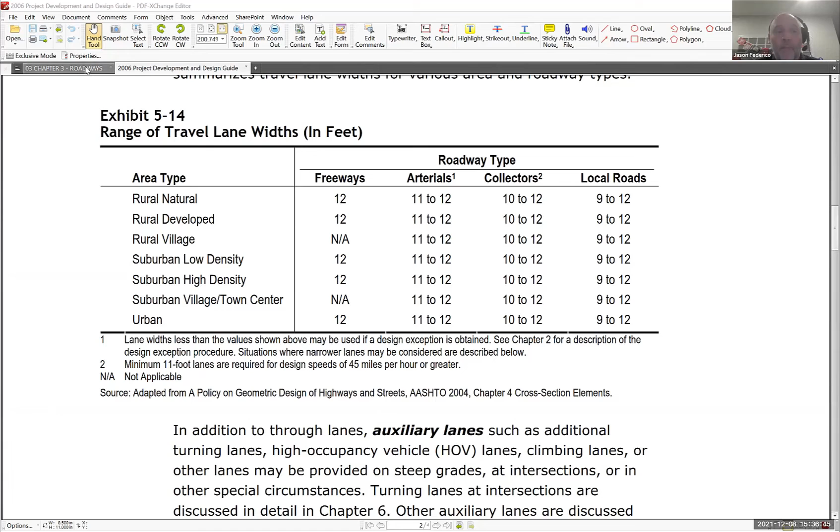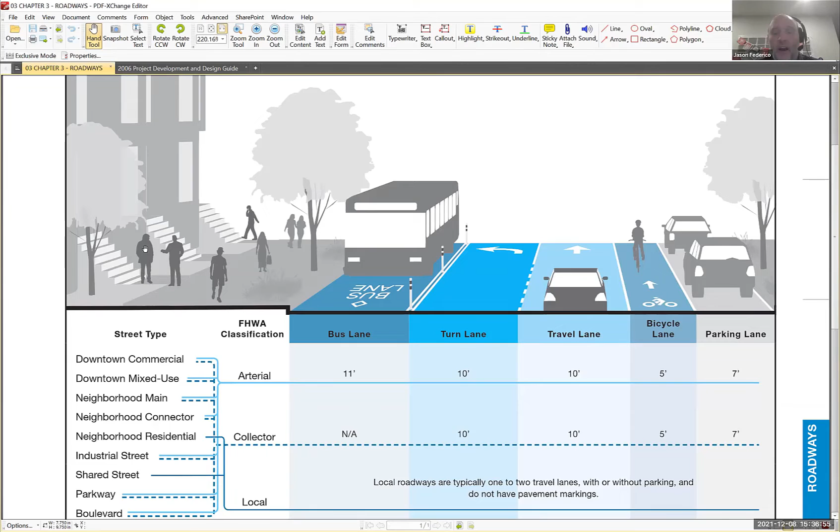I'll try and share mine because I want to make one point on the lane widths and what the code is. This is Mass DOT standards for local roads, 9 to 12 feet. And the City of Boston guidelines are similar, down to 9 to 10 feet for local roads. So it's not unheard of to have lane widths less than 10 or 12 feet.

The goal of that, as Chief Sylvia said, is traffic calming. By making the lanes narrower, it forces people to slow down. They don't feel comfortable driving at high rates of speed when the lanes are less wide.

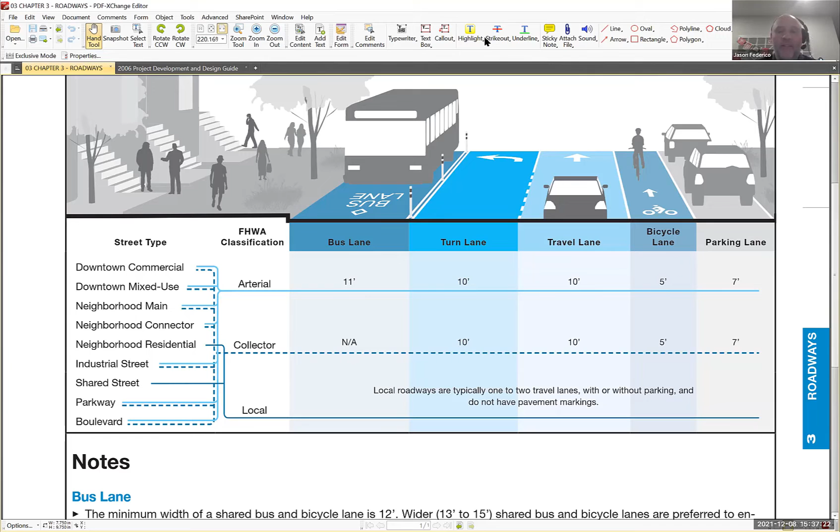Yeah, you design the roadway for the speed you want people to go. That's all well and good. Can you hear me? Sure.

We are a collector road. That's Cunningham Bridge. It's not a collector road, Ralph, that's a local road. How come Cunningham Bridge and all of those roads are collector roads and this is not? It's continuing, but even a collector road can go down to 10 feet wide. Well, by that standard, the point is it was called a collector road.

But anyway, let me go back. If I can't share a screen, I will just tell you what some of these things really say, because I think it's important to use the data, not opinions, but data. You're talking about traffic calming, but no actual speeding is shown on any of the data, and the data is quite comprehensive, okay? Again, if you can't see it, I'm sorry. It says I can share on all participants, but it's not sharing.

But Ralph, that's the point. That little caret, don't click the caret, click the big part of the green button. I did, I'll do it one more time, but I have done that repeatedly. I'm not doing the caret. I'll do it one more time, Jason. It'll come up and say what do you want to share, so share screen, right? Do you see that one? Do you see my screen? Nope, you don't. Click it. When you click it, Ralph, it should come up and say what part of your screen do you want to share, the whole screen or one part? You're clicking the thing that says all participants, host only. That's because you're a host. I understand this well, I've done this many times. At the present time, I do not have a share screen capability.

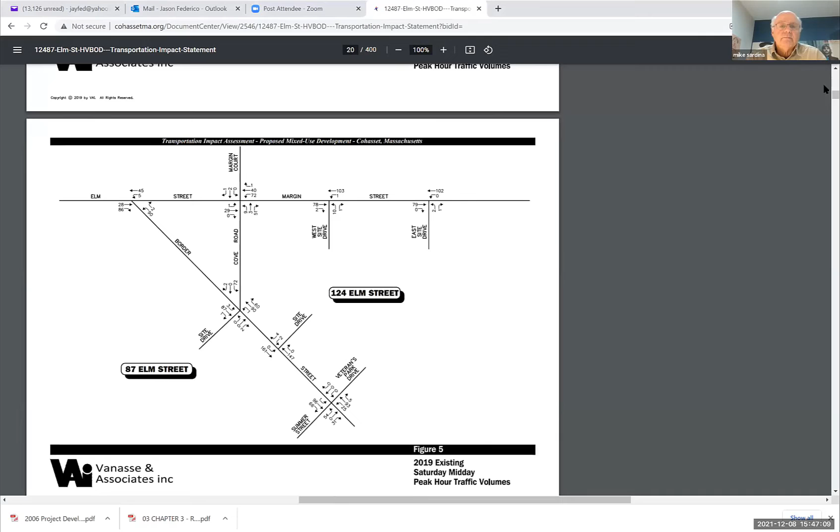Yeah, anyway, I'm not discounting the facts in that thing, Ralph. I think that's probably perfectly reasonable and important data we should all take a look at. I agree with that, but I'm just saying the reason for it to even exist was because somebody - the town or whoever - wanted to know how this was going to impact traffic on the rest of the roads. And we asked for it as part of the planning board special permit. But it's not there, they don't see it.

That's it, Jason is showing it. No, yeah, I found the study. Whose screen have we got up right now? That's mine.

And of note for this, Ralph, as far as speeds are concerned, the speeds are more in the Elm Street stretch that's straight, so you're not gonna see those speeds necessarily in here either. So a lot of why residents, like in the 50s, complain about the speed of cars on the street, which isn't in here.

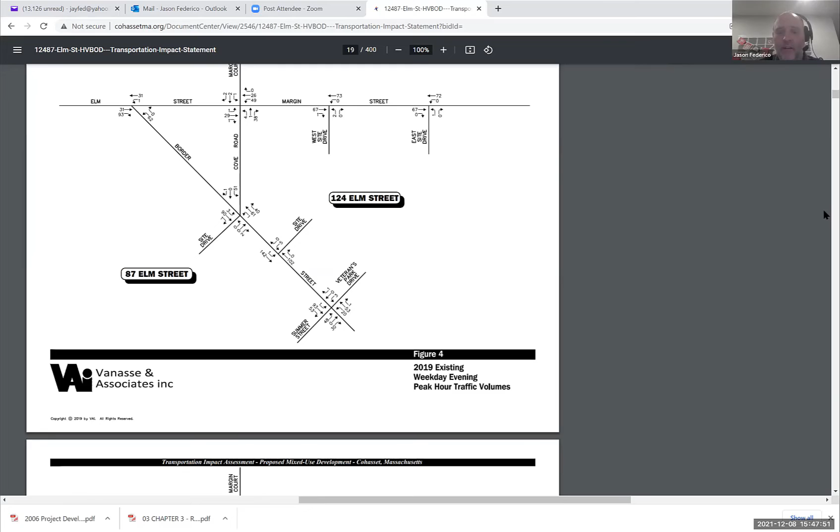Well, why don't you go to the actual data where they talk about speeds? Yeah, you got it right there. Right.

All these measurements are at the intersection. And also part of the planning board findings, I think Clark, was they wanted the Cohasset Harbor Hospitality Partners to deal with the impacts of traffic on the intersection as well, and they actually had them set aside money to pay to help do that as part of this process.

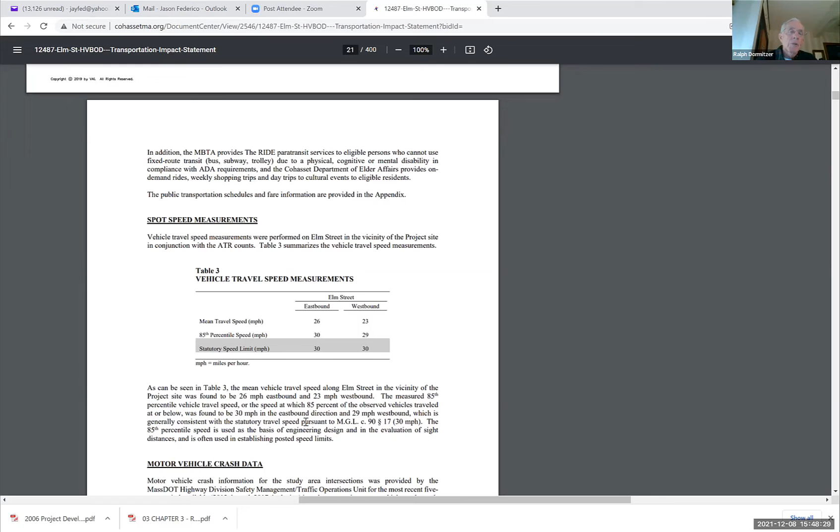Right, but you don't see in your own graphic right now, and this is exactly right, this is the document, you do not see the speeds and what anyone's talking about. You can't simply say there is speeding when there isn't any, and you can't say that this excludes Elm Street. It doesn't exclude Elm Street. It doesn't say that at all.

But the point being, if people are going 30 at a stop sign, that's not a good sign. There's a stop sign there where this 30 mile an hour or 26 mile an hour speed is. So I would think that people are not going to stop at the stop sign, and that's the issue, is you get continuous speed there.

You know, that's not a good argument. You shouldn't assume that people are not stopping at a stop sign, and just, you can't ignore the data. I'm very concerned when I hear people ignore the data and make another argument. That does not make sense to me. You've got to use the data that's there.

Well, I think that's telling you what she said, the data is in a specific intersection and not in the corridor. That's my point. Ralph, do you accept the fact that this data is very specific to that intersection?

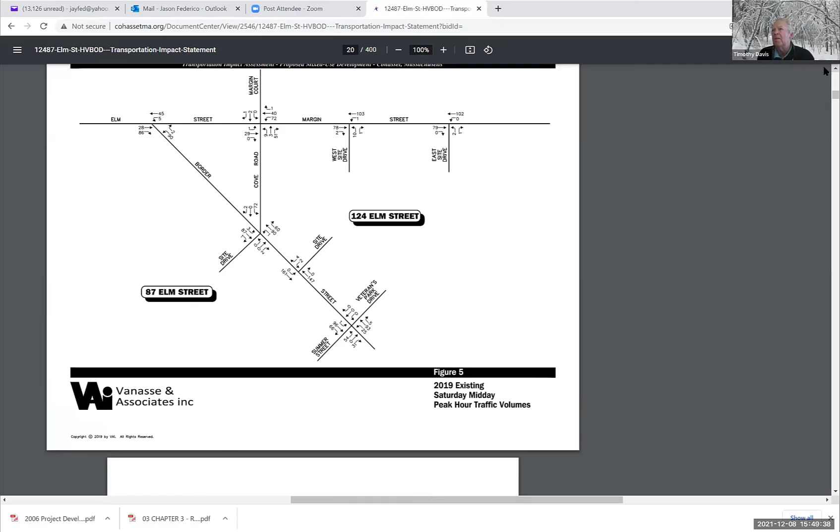Well, bring it back up again. Let's just read what it says. Bring it back up again, Jason. Back up. Okay, it says.

Can I jump in? It says, as you can see in table 3, the mean vehicle travel speed along Elm Street in the vicinity of the project site was found to be 26 miles per hour eastbound and 23 miles per hour westbound. Now, what is wrong with that statement?

Mike, if I could just jump in real quick. This is the observation of a company that was there for a very small period of time. I'd like to know the time of day, the time of the year, I'd like to know everything. I don't see that in this graphic, so it may already be there, but what they did was a very small sample of time.

My observations are based over 42 years of being on Elm Street, of being a neighbor of Elm Street at 44. So whether they tell you they're speeding on Elm Street or not, the people that live on Elm Street will tell you that people speed on Elm Street. It's something that constantly comes up with the neighbors: how can you slow the traffic on Elm Street?

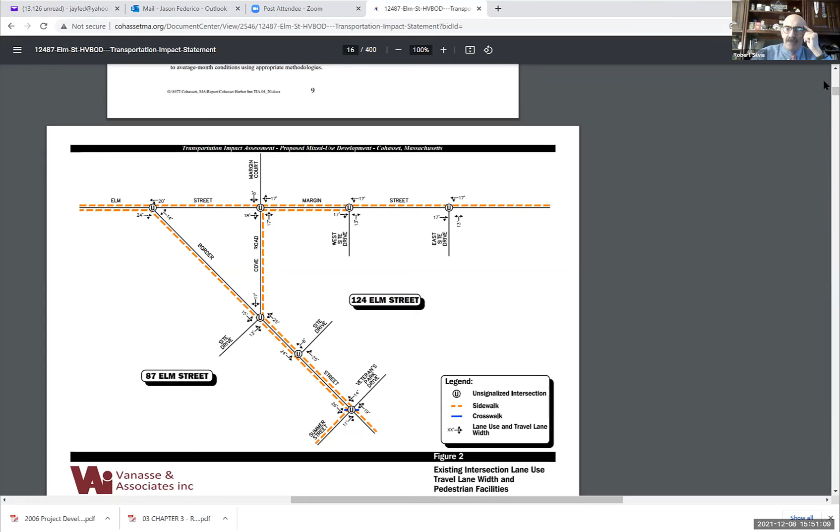So it's the observation of the people that live there that means something to me, not as much a study that was done for a very small period of time at a specific time of the year or whatever the case may be. So I think the anecdotal evidence from the neighbors is very important, because they're the ones that are going to have to live with what we recommend at the end and what the town decides. It's the people that live there that are going to have to deal with the ramifications of whatever is decided.

And that was also represented in the town-wide survey that was available. That was like the number one concern of people who responded to that survey, was safety on Elm Street. And that obviously implies either not stopping for stop signs, crosswalks where there's kids, or speeding. All those things are part of that general comment about safety on Elm Street.

I still don't think it would hurt to call the county and have them put their traffic count and speed thing down. I don't think it costs any money, it's just a request. They drop their ticker in for a week or two. You could do it this time of year, but really you want to pick it up in May and maybe again in August to get some good solid information.

Well, the biggest problem right now is the condition of the road. With those trenches there, people aren't gonna drive as fast as they used to drive down there. Right, it keeps it nice and slow, so maybe we keep those. But what about the potholes?